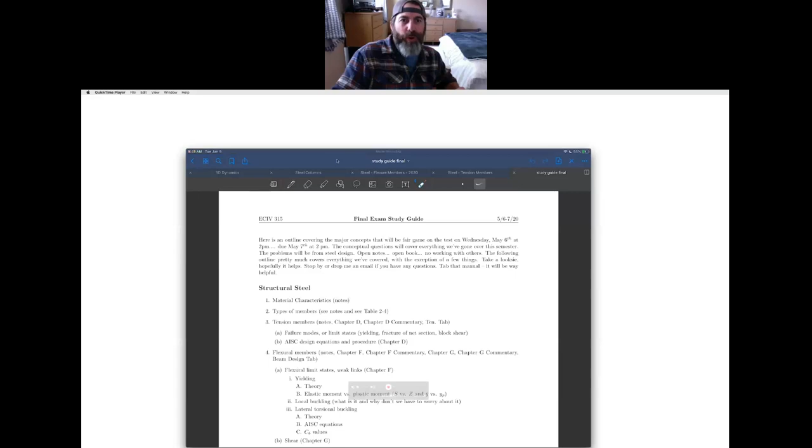So the way it's structured, just so you know, starting tomorrow at 2 p.m. I'm going to post it on D2L, and then it'll be due 24 hours later.

I'm going to break it into three, or it's the same idea. We're going to have conceptual questions for a third, a problem focused on beam design, and then a problem focused on column design.

The short answer stuff, the conceptual questions at the beginning, will be for the whole semester. But it still is going to concentrate on steel mostly. Anything from the beginning part of the semester is going to be fair game, at least conceptually.

The conceptual questions component, I'm going to put on D2L. It's going to be a quiz on D2L, similar to the lab quiz you guys did. I'll set it up so you could start it any time in that 24-hour period, and give you like an hour or so to work it out. But it shouldn't take you that long to do the short answer, true-false questions.

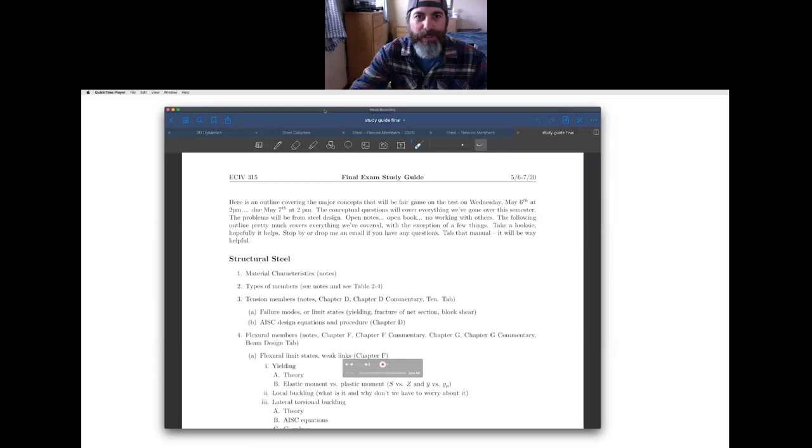Did that work okay for you guys on the lab final? Maybe, maybe not. It worked. He graded all of them already. I don't hear any major complaints. No major complaints.

All right, so I think it's going to be the same idea for the conceptual, and then the other two parts will just be you work out the two problems, and I'll set up a box in Gradescope, and you'll submit it through Gradescope, similar to what we did for the last exam, and then I'll go through and grade it.

What else here? Let's see if I can see chat. Anyways, so Mike, just one thing on the D2L quiz.

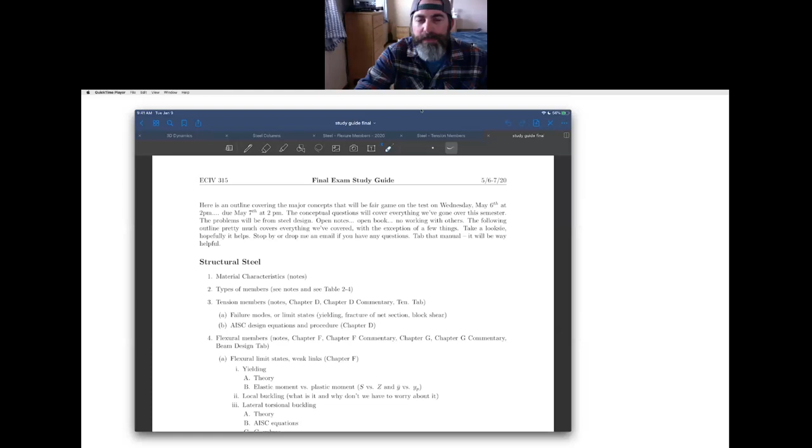I guess the only thing I would suggest is, if it's like a multiple choice thing or whatever, just make sure that it's understood - are you supposed to check more than one, or is it just one - just make sure the question is clear, you know what I mean?

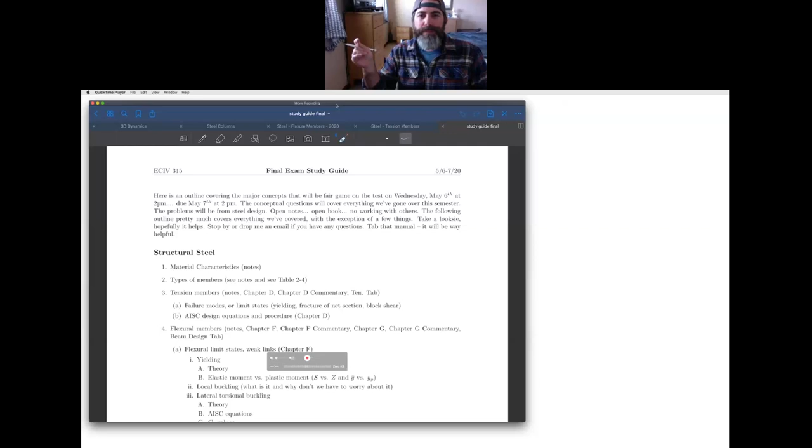Yeah, absolutely. So I'm assuming it wasn't clear last time. There's a couple problems. No, there were a few of them where it was like, okay, I don't know how many to pick, or if I'm supposed to pick one. It seemed to all work out at the end, but it just wasn't totally sure.

Sounds good. Yeah, Jaden did that one, so I'll double check and try to avoid those. I think he's going to put this one together for me, but then I'll make sure that it's all squared away. Thanks for the feedback there.

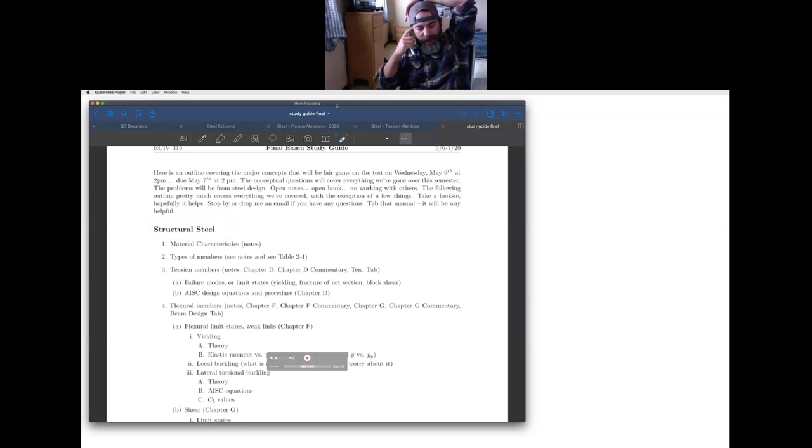Back to school, Paul. Now, so there's the overview of how it's going to be structured and the components of it. I gave you some - there's a study guide for the other two exams if you want to take a look at those. But again, the focus this one's going to be primarily on steel, so I was just going to go through what we covered in steel. We start out with material characteristics.

I might just flip over to what we did. I'm just going to go through the notes here.

So we talked about the design philosophies, LRFD versus ASD. We're going to focus on LRFD. The pros and cons of steel design.

I hate to admit it, but steel is pretty sick. It works pretty well, it's very predictable. It's actually a pretty nice material. So it's got a lot of pros. It's got some cons, right - it melts, it rusts, it's fatigue sensitive.

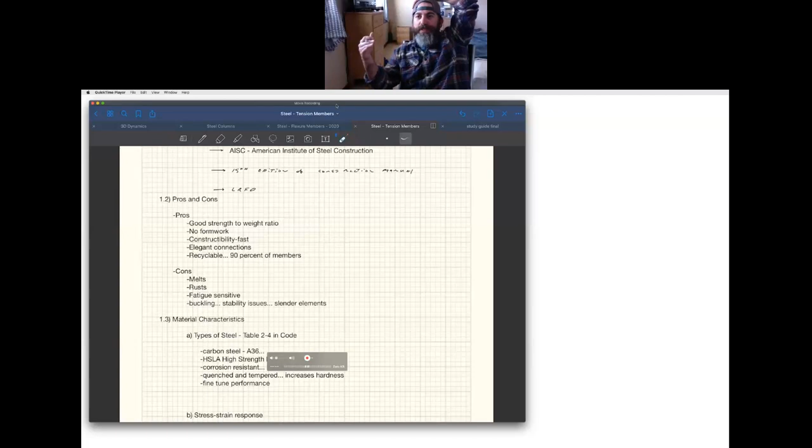Everything buckles, and that's something you should be picking up on throughout all of these, except for tension members. Buckling was an issue - instability kind of controlled the capacity of a lot of things, okay?

And then we talked about material characteristics. We looked at the stress-strain response, what the modulus was, some other key components that were in there. And then we talked about the different types of members, right? Spent a little bit of time on this table right here and went over the types of members there were, and then what they were used for.

What else do we have here?

Then we got into tension members. Tension members typically are going to be part of something. You don't usually just have a tension member carrying tension by itself. It's usually part of a truss or another type of structure.

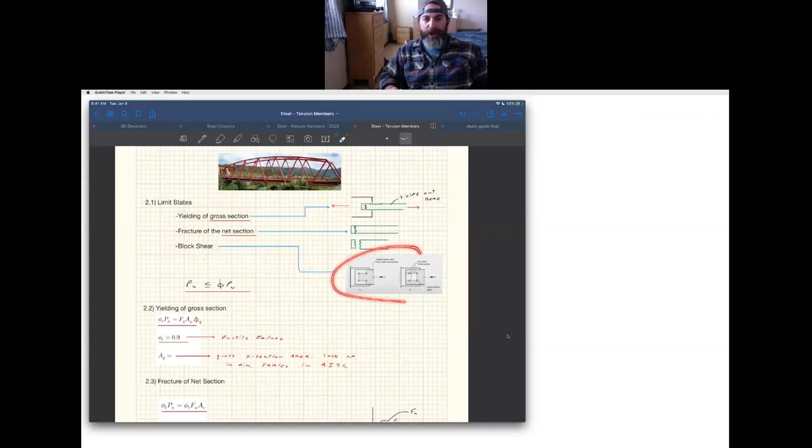We introduced this idea here, the first place we saw limit states. How is the member going to fail? It's either going to have yielding of the gross section, fracture of the net section, or block shear. I think it's worth looking at what block shear looks like. You don't need to study this too much, we didn't talk about how to calculate it, but just knowing what it looks like is important. There's this idea of yielding of the gross section versus fracture of the net section.

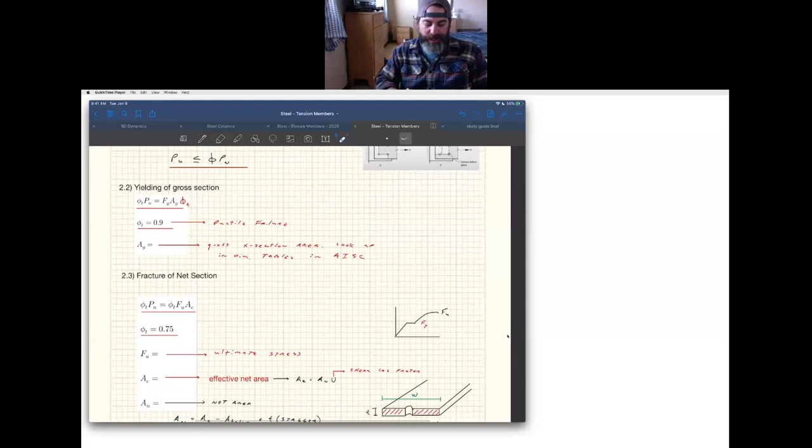The way we did this is we calculated the capacity for each of these, and the lowest one controlled the design. So just look back at the notes on how we go about calculating those capacities. Calculating yielding of the gross section is really easy, but calculating fracture of the net section is a little bit more complicated, because you had to look at how many holes there were, which affected the capacity.

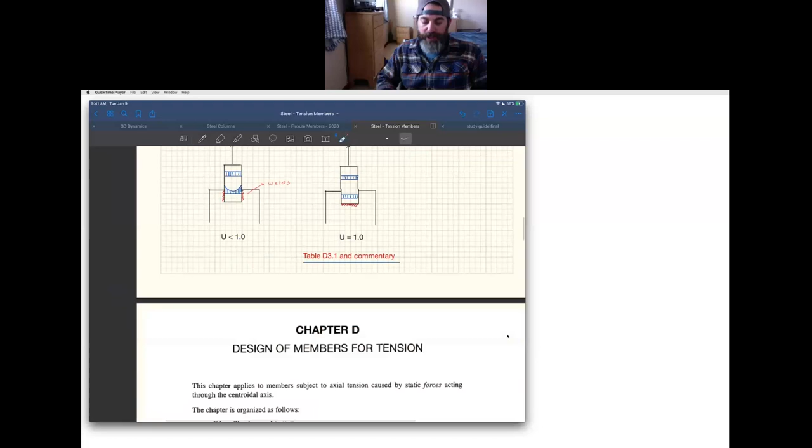If it was staggered or not staggered affected the capacity. If we transferred the load uniformly or non-uniformly, you kind of get penalized if it's non-uniform like we have here. That's where these U factors play in. It was pretty straightforward from there, with lots of little mini limit states within this limit state.

Which hole is it going to rip through? Is it going to be one hole, two holes, three holes, stuff like that? You had an assignment associated with that as well.

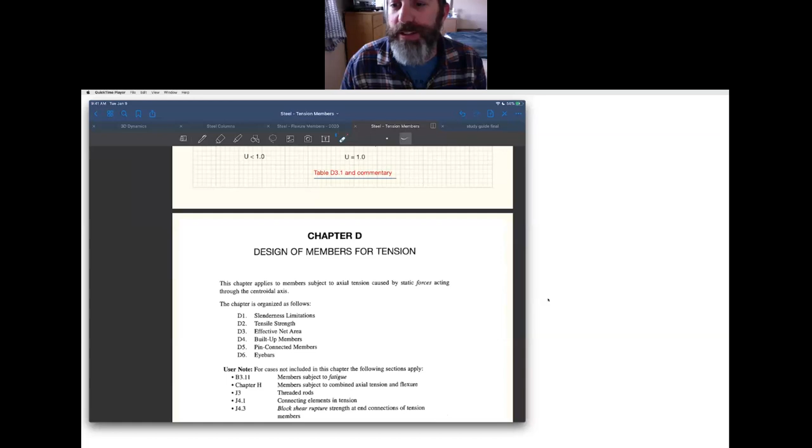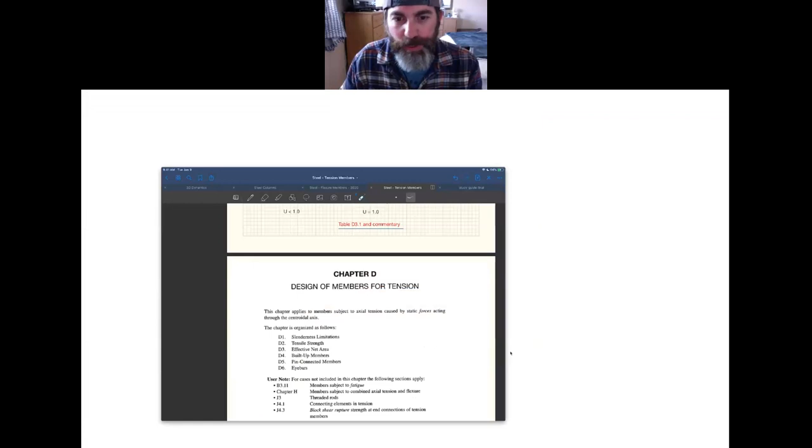When you calculated those capacities, we looked at the limit state of ripping through 2 holes versus ripping through 3 holes, and it showed that it was going to rip through 3 holes. And it actually ripped through 3 holes.

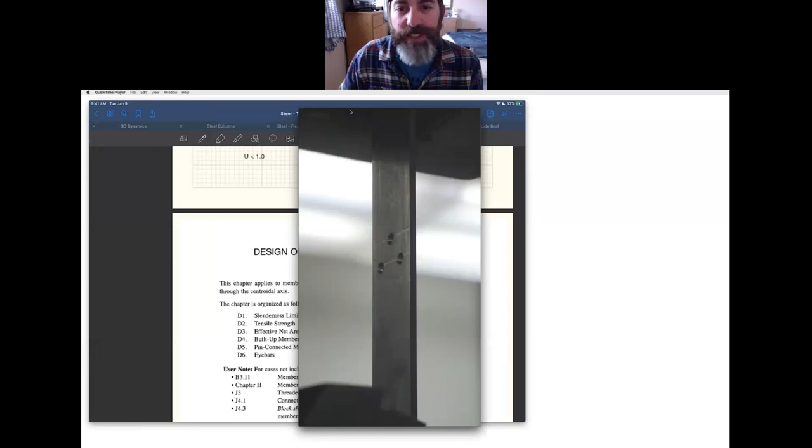And it said it wasn't going to yield around the section either. This guy now, the last one we did, this is plate 3. If you actually look at the calculation, this one says that it's going to yield over the gross section, over the entire height first, and then it's going to fail through 2 holes, is what the prediction was.

Okay, and so here, if you watch it here, so there it goes, it starts yielding right around the holes again. But then once we keep loading it up, the least mechanism in this was yielding over the gross section. So we should see that yielding spread everywhere.

And so if you keep going here, you see that yielding it's just taken off. Right? Now it's coming down from the top. And so look how much the thing is deflecting. You can see it just deflecting over this entire height.

That is considered a failure mechanism right there. Look how much it's deformed. Like you can actually see it deform. That whole thing is yielded. Right? And so that is considered a failure mechanism right there. That would be the controlling mechanism.

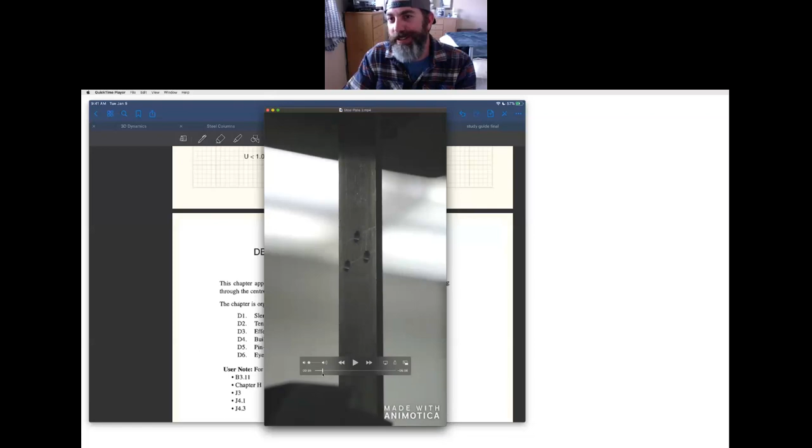Eventually, though, once you keep applying the load, the whole thing goes through strain hardening, and then it rips through 2 of the holes. And what's really cool is that the calculation said it was going to do that, and then it actually did that. Unlike concrete, where we said it was going to do something and it didn't necessarily do what we said it was going to do, steel will do what it says it's going to do.

And I think that one's pretty cool, especially this one, because you can see all that yielding before failure. You guys have any questions about that? I just wanted to highlight it because I think it's worth doing. I think that's some pretty good stuff.

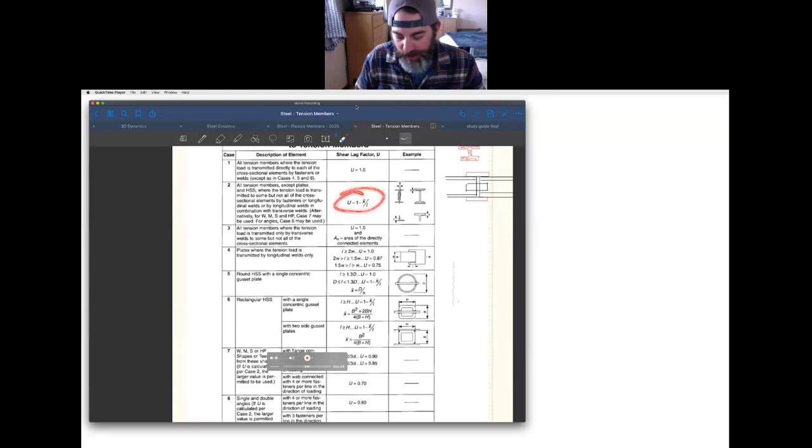So then that's calculating the capacity of tension members, right? We looked at where in the code it talked about that. All this stuff is the code, the specifications. The hardest thing here is determining what this X bar was for calculating this U, but we had a couple of examples, and then you got to do that in your homework.

Right, there's some stuff in the commentary as well, right? How to calculate what the L and the X bar are for the different capacities, and then we did an example, okay? So that's kind of the steel thing.

The one thing I wanted to point out that I did not cover before in class that you might want to look at, is that there are design aids for tension members as well. This is what I skipped over. It was like on a page that I didn't make it to. But this is table 5-1.

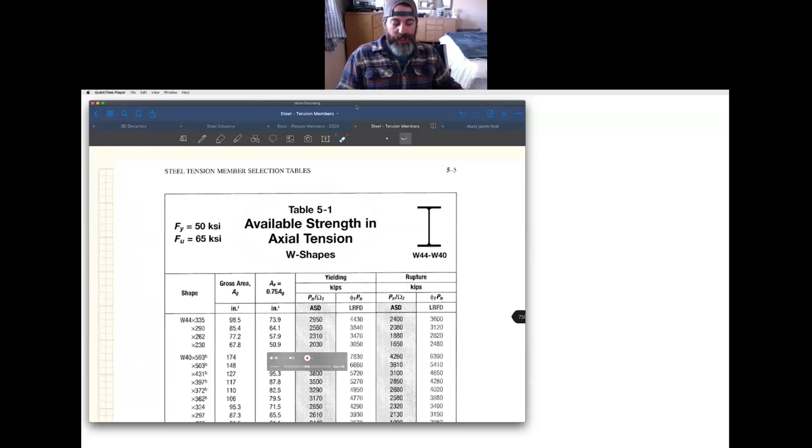This is under the tension tab. If you look at your steel manual, there's a tension tab. If you flip it open, they have this, right? Available strength in axial tension. Okay, and in there they just go through, right? And you look at phi PN, right, for a bunch of different members.

And the way you work this is you look up the capacity, right? And then, so this is what the tensile load is. This is what your PU you would look up in here, and then you could design it according to these members over here. But the one thing is, right, that

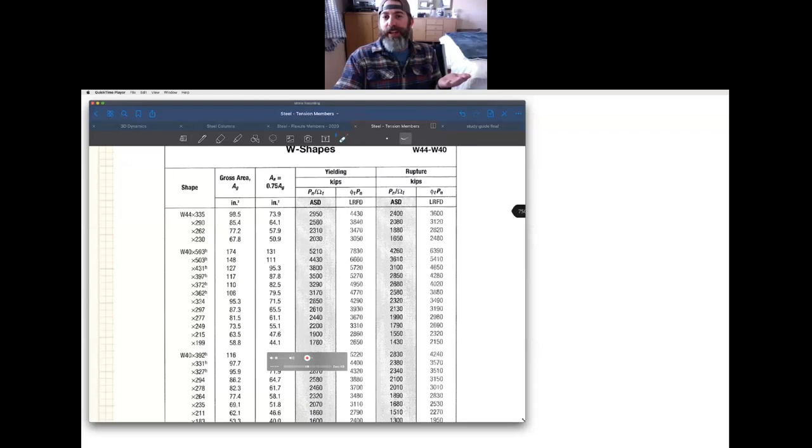you need to know what the hole patterns are and stuff, right? In order to use this table, you need to know what the holes are, right? How many holes do you have in it? What's the U value that you're using? What's the net area that you're using? All sorts of stuff that it's very specific to the member.

So to use this table, it makes an assumption that the effective area is 0.75 times AG, right? You don't know that that's going to happen because you have your own holes drilled in it or punched in it. And you have all the stagger factor that's floating around, and what are you using as a U value? All that's built into calculating this capacity. But to use this table just as a starting point to get going, they assume this AE is 0.75 AG, and then you could use this table.

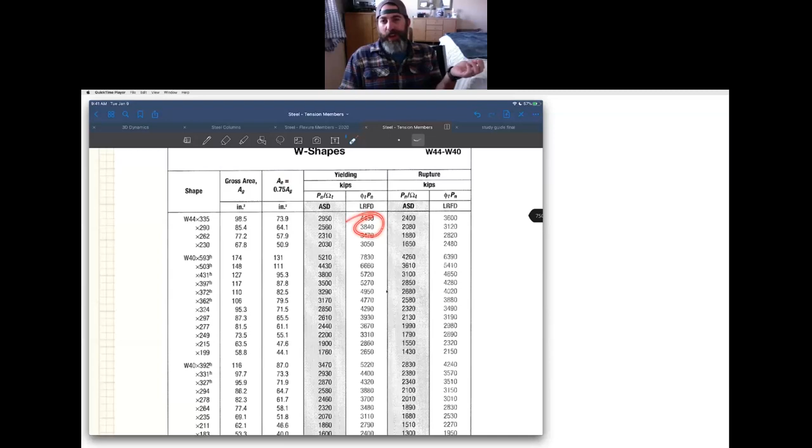So I just wanted to point that out. That exists. And in previous years, I've looked up this homework problem, for instance, or this example problem, and you could use that table. But then you'd have to calculate what that effective net area is and whatnot. But anyways, I just wanted to point that out as we went through.

Okay. Let's go to the study guide.

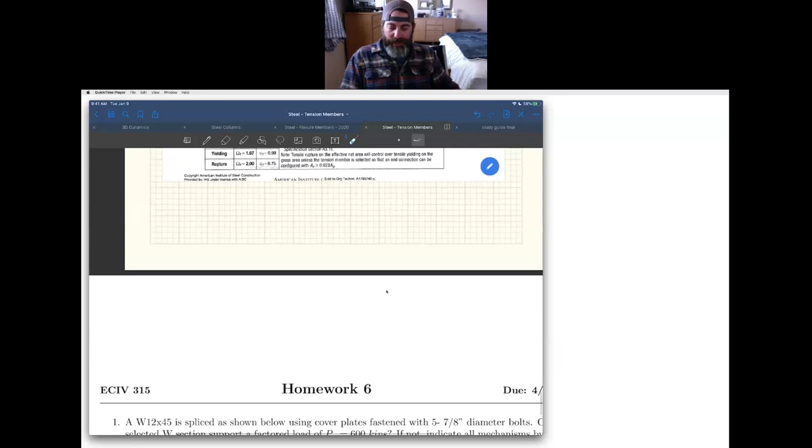The other thing I want to mention about the study guide is I've gone through and called out where you might want to put tabs, like where in the steel manual you find these things. So table 2-4, you'll talk about the types of members and the standard material it's made out of. Tension members, chapter D commentary, the tension tab, that's where you'll want to put your tabs.

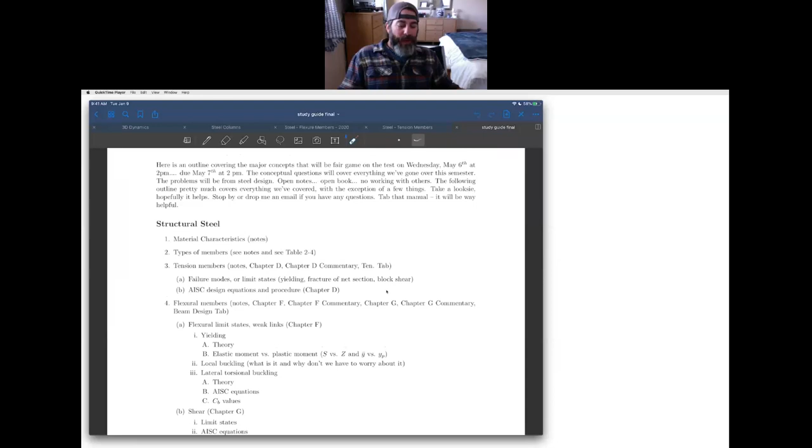And same thing when you go down to flexural members, I've called out the key components and where you calculate that or get the information from. That's something I've done over the years because I was trying to be consistent when doing notes, but I don't know if I was super consistent. I might have missed calling out certain sections of the code.

The next thing we covered was flexural members. I'm just going to do the same thing - go over to flexural members and look at our notes.

Any questions about steel tension members? Anything you didn't quite get that we want to spend a little more time on? Good to go.

So flexural members - this is bending, right? We first talked about what are the limit states. There's flexural limit states: yielding, that's the formation of a plastic hinge. There's local buckling, that's the buckling of a flange. Or lateral torsional buckling, another limit state that can happen, but that's a global buckling procedure - we'll get into those more. Shear has yielding of the web, buckling of the web, and then serviceability, we only looked at deflections.

In terms of flexural limit states, what we looked at that governs our LRFD stuff is this formation of a plastic hinge. That's where the steel yields over the whole height of the member. The way you calculate this capacity is you assume the steel is yielded on the compression side, yielded on the tension side, then look at your C's and T's and sum the moments.

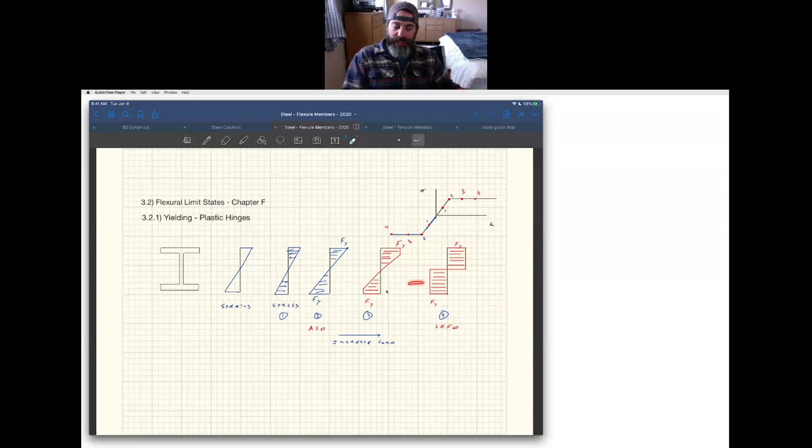The good news is AISC has all these things tabulated. We went through and talked about the difference between the elastic section modulus versus the plastic section modulus, and how to calculate these capacities based off of this. Those Z values, Fy times Z, Z is tabulated in the code. The AISC manual has organized these things based off of Z, because that's a key property we have in design, so they've made a table sorted by Z's.

So the elastic moment is Fy times S, the plastic moment is Fy times Z - the plastic section modulus versus the elastic section modulus. We did a little example with that.

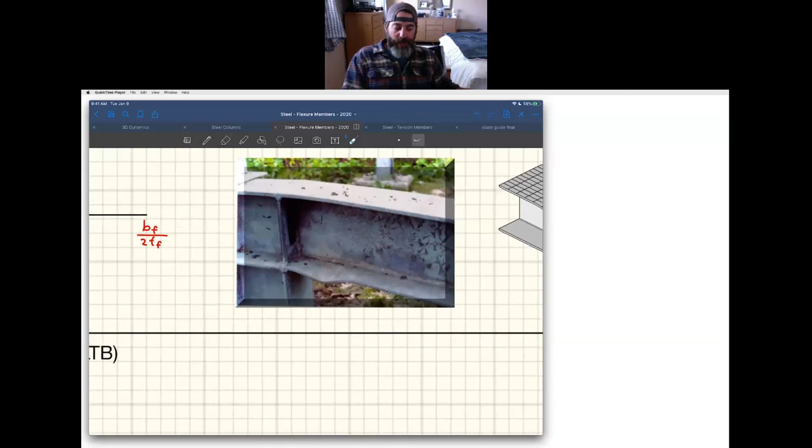Then we talked about local flange buckling. This is what local flange buckling looks like - that flange was in compression and it buckled out. Notice it's not buckling over the entire length of the member, just in one little place. That's why it's called local buckling - it's just buckling in one small spot.

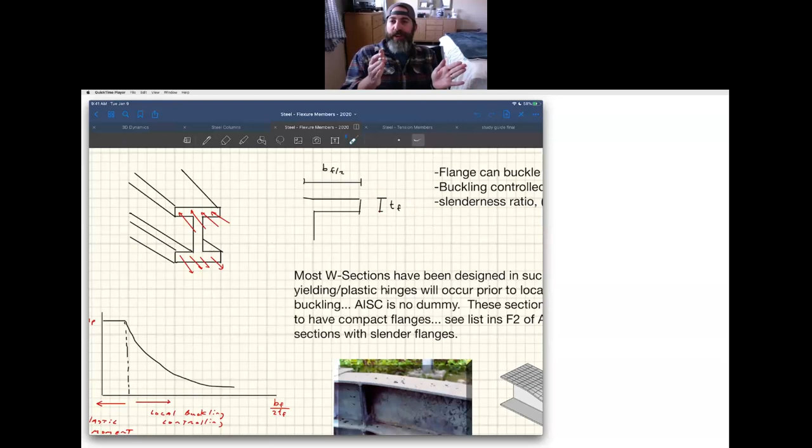This is not going to be an issue for most wide flange sections because AISC is no dummy - they've made this ratio, bf over 2tf, stocky enough so it will hit the plastic moment capacity before you get buckling in one of these flanges. Very clever of them - it wouldn't make sense to make these things slender versus compact. If slender, they're going to buckle and reduce your member capacity. But if stiff enough, stocky enough, you don't run into problems with local buckling. For most sections we didn't worry about that. It's important to know what local flange buckling is, but then just know we don't have to deal with it.

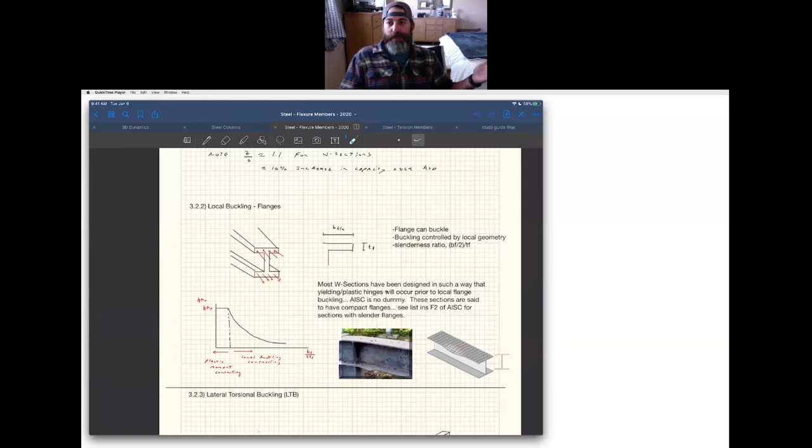If you're dealing with a built-up section where you make one of these yourself, where you take this plate and weld it to this plate and weld it to this plate, then you have to start worrying about this. Or if you have one of the few sections, you have to worry about it. For the most part, though, there isn't an issue.

And then we went on and talked about lateral torsional buckling - we'll come back to that. We introduced what it was: this idea that you get compression up at the top under positive bending, or on the bottom under negative bending. But on whatever the compression flange is, if you don't support it, this thing wants to buckle out to the side, and it wants to flip on its side.

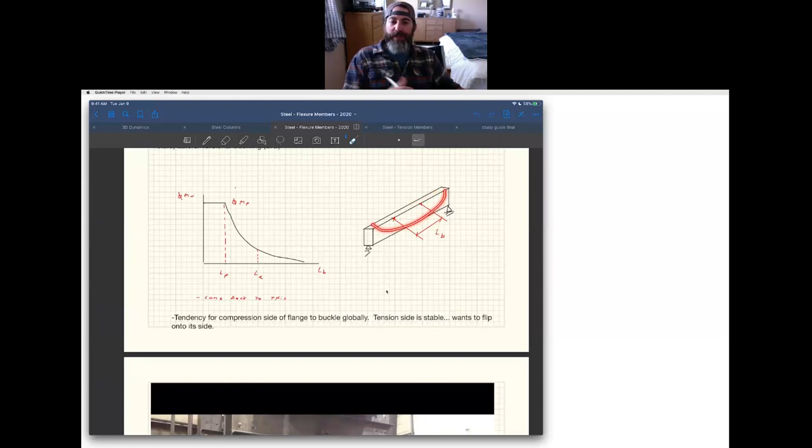If you look back on the YouTube, I've got a little video of Tim White - got me here in the background too, the young guy right there, no beard. We did some testing on this, and if you watch the video, you can see this thing go through some lateral torsional buckling. In this case, the compression flange up top is not supported, and so it buckles out. That complicates the design for sure.

Shear limit states - we'll go back to lateral torsional buckling in a minute - but the shear limit states: either it yields across this web right here, or you get web buckling. It's the same mechanism that caused issues in shear in reinforced concrete.

Shear in reinforced concrete ran into problems with these tension forces, and we get a crack that would go like this. On steel, the web runs into problems with these compression forces because this thing wants to buckle, and it would buckle kind of in this direction here. You can see an example of where they tested a member and got web buckling.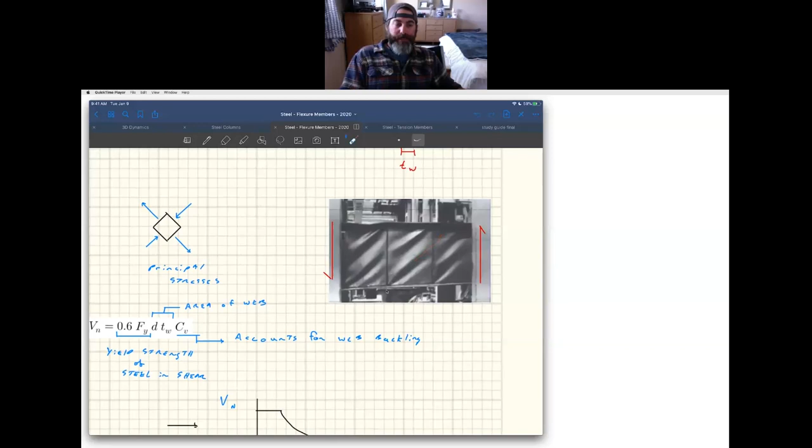But similar to local flange buckling, AISC is no dummy. They made the H over TW stocky enough that it's going to hit the plastic moment capacity before you get reduced capacity due to buckling. They really thought this through.

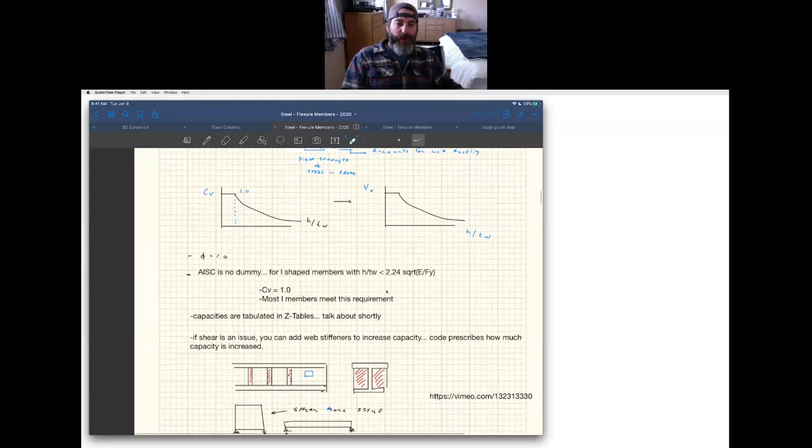We talked about stiffeners, and when shear would control or not control. And then we got into deflections.

How do you calculate deflections? Well, usually there's some sort of limit - it's going to be some fraction of our span length. Live load deflections, like L over this - most standards say your live load deflections have to be less than L over 360, or your total loads have to be less than L over 240.

Where do these delta live loads come from? Well, they could come from solving this 4th order differential equation, or you look it up. These tables, if you go into structural engineering, are super helpful - they have the shear and moment diagrams for all these cases. It's turned shear and moment diagrams and deflections into a matching game.

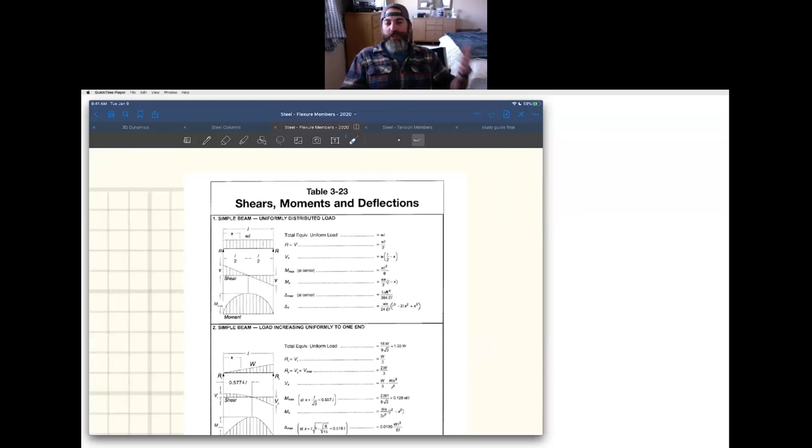You look at your loading conditions, you look at this table, it tells you what your shears and your moments are, and it tells you what your deflections are. When you calculate your deflections, the other thing to be careful of is the units that you're using in these equations.

Also, you use service loads - nobody's going to die if your deflection calculations are not perfectly accurate. Because of that, you don't use the 1.2 and the 1.6 factors; you go straight to your service loads, what you actually think your loads are going to be. That's covered in this little section here.

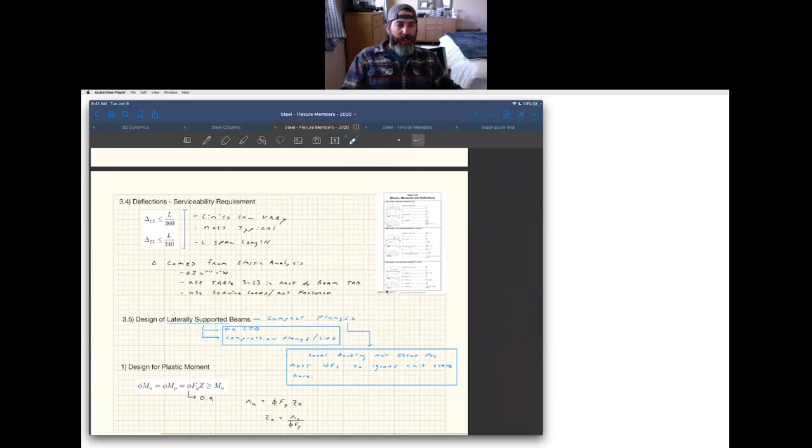But then for no lateral torsional buckling - how do you go about designing these things? Just really quick: use the Z tables. The Z tables have these things organized by Z. You can either calculate this if the yield strength is different - you have to calculate what your required Z is - or you just look up phi Mp in the manual and make sure that your phi Mp is greater than your Mu.

And then to do shear design, super easy - in the Z tables, you look over to the right and it tells you what phi V is, phi Vn, straight up for all the members. So checking that capacity is pretty easy, and then you check your deflections. That's a standard design - we did an example of a standard design.

You had homework with that. You guys should have that one down pretty good.

The thing that gets a little complicated is if you have lateral torsional buckling, if you don't have supports along the length, then things get a little bit more complicated, but also not too unruly, okay?

So lateral torsional buckling, again, is this top flange wants to buckle out, or if it's a negative bending, it's the bottom flange that wants to buckle out.

And depending on what governs that is what this unsupported length is. If this unsupported length is less than LP, which is tabulated, then it's the plastic moment that controls. If that unsupported length is greater than LP and less than LR, inelastic lateral torsional buckling controls - you're kind of in this region. If your LB is greater than LR, then you're in this region, and it's elastic lateral torsional buckling.

And the code has equations for each one of these things. This one we already know. These ones are getting pretty complicated. But to do a design for this...

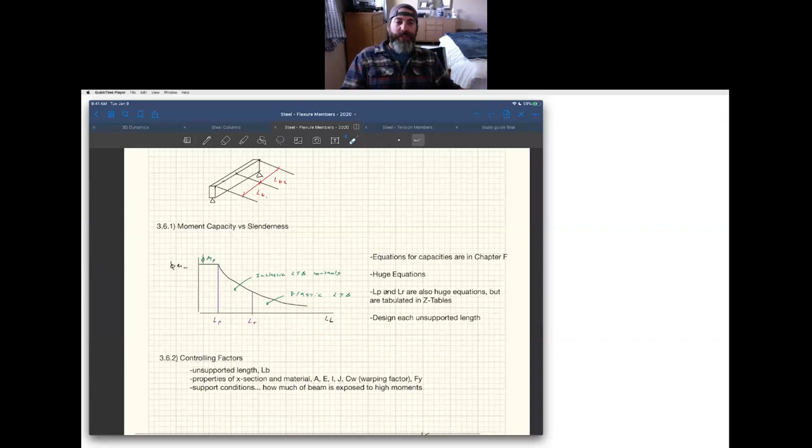gets super complicated, because if you look at the equations for this and this, there's no simple variable to solve for to do design. So they have a method for doing that, which we're going to get to.

I mean, they basically have just plotted this curve for all the different members in one giant table. One giant table that spans 50 pages or something like that, okay?

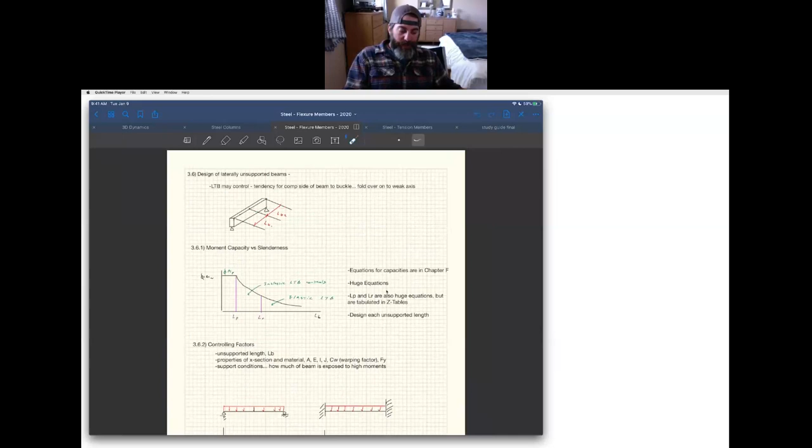The other thing though to be careful of, the other thing that governs how susceptible something is going to be to lateral torsional buckling is all these properties, right? Material properties and geometric properties of the section. These would go into what LP and LR are, okay?

So this one will have you get rewarded with a CB value. This is going to have a CB value that's going to be bigger than this CB value, okay? And so we have to account for this effect as well.

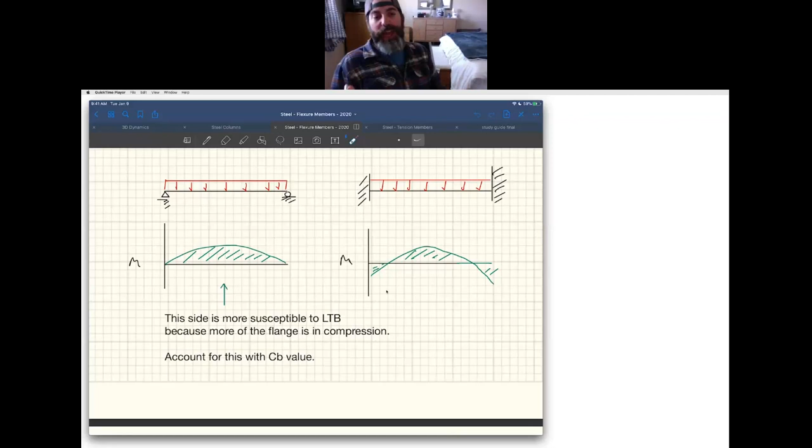How much is the compression flange in compression? What percentage of the length is in compression, as well as how extreme is that compression? In this case, it's not that extreme because you have zeros at the ends and zeros at the ends. This case right here, really extreme, right? Because you have the worst case compression stress along the entire length of the member, right?

And so this is the worst case scenario you can have is 2 moments on either end, okay? And then you'll get a worst case uniform moment across the whole thing. In that case, CB is equal to 1.0, okay? That is the worst case scenario, is make it CB equal to 1.0.

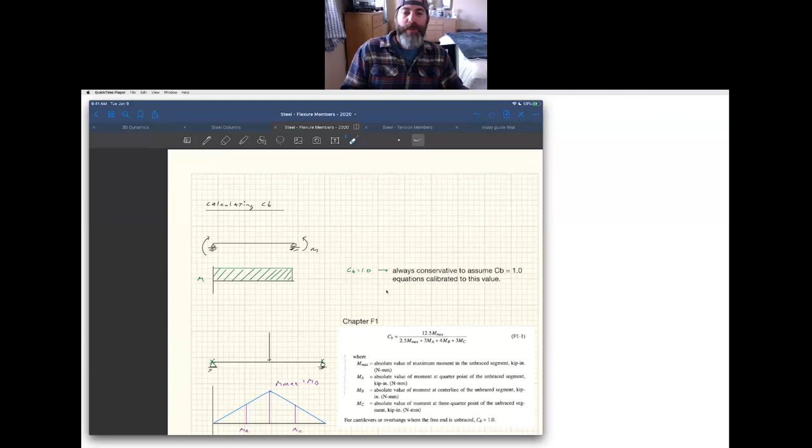How do you calculate what CB is? Well, there's this whole equation right here, and you did this in an example. We did it here. You did it in your homework, so you should know how to calculate what that CB value is, okay.

So CB's got to be in there someplace, right? It's in those capacity equations.

If you look in the code, the design aids, we got Z tables, we got I tables. So if for some reason your deflections control, you can use I tables. Those things are just organized by members in order of their I's. And they've done that because just in case deflections control, they've got them ordered by their Z's as well.

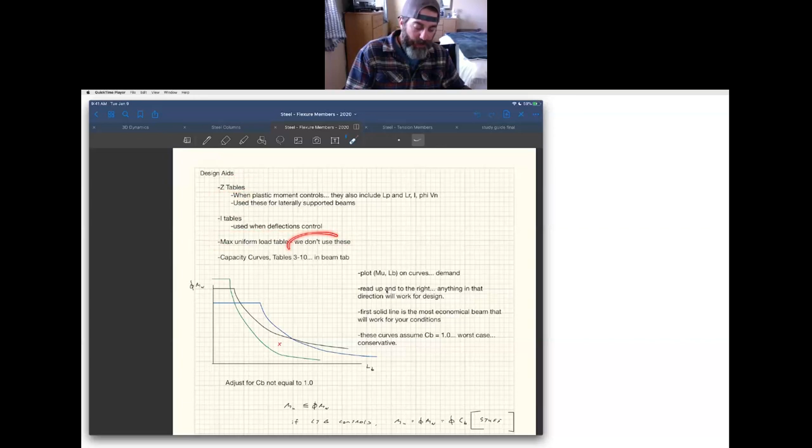There's these max uniform load tables. I don't use those, those are kind of weird, okay. And then capacity curves are the other thing. That's what we did use.

So again, what they've done is for every single member, every wide flange in their arsenal, AISC's arsenal, they've gone through and put all of them in one big giant table. And that's what that table 3-10 is.

But what you're looking at, each one of those pages are little subsets of this, right? Each page is like some component of this, okay? And then you just look at each page, and really, if you pieced them all together, you get the big picture, was just looking at this.

The way you use this is you plot your demand, MU and your LB, you read up and to the right until you hit the first solid line. That gives you the most economical member, okay?

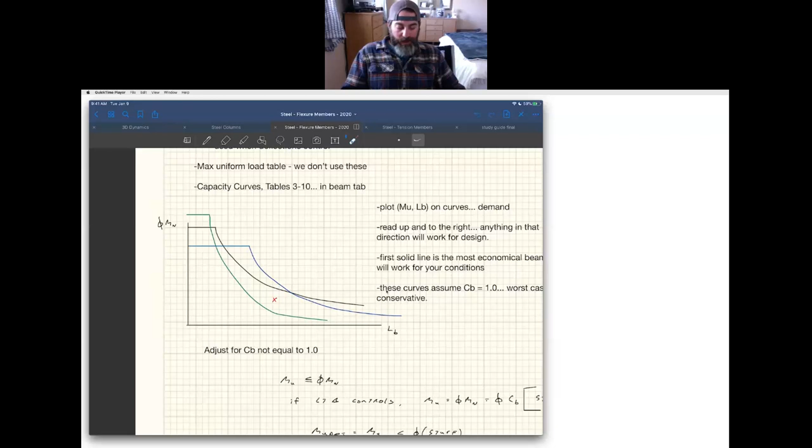Yeah, and so we got to use those tables. Those tables are specifically for when CB is equal to 1, worst case scenarios. It will always be conservative to assume CB is equal to 1, okay?

But if you're not always trying to be conservative as a structural engineer, you want to be the most efficient, right? You want the most efficient section. Your clients won't be too happy if all of their members end up costing twice as much because you were just being overly conservative. They don't want to overspend on their building.

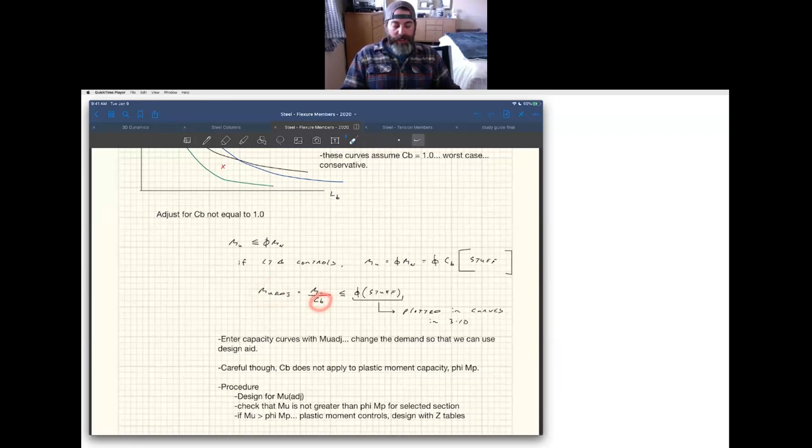And so if you have to sharpen your pencil and calculate CB, you can use these tables, but it involves adjusting your moment demand. You take your moment demand, divide by CB, and then use that new moment demand in your table, and you read up and to the right. But in order to do that, you got to be a little careful about what's happening with the plastic moment. I laid out a process for how to handle that and make sure that it's okay.

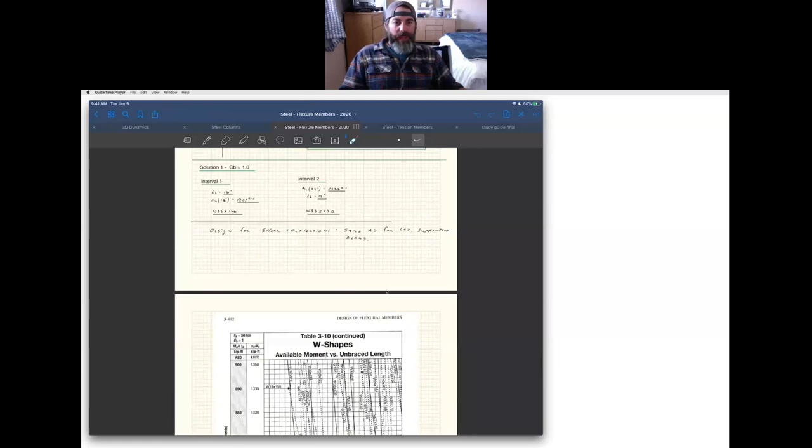And so that's lateral torsional buckling. We went through and did an example associated with that as well. We did it once calculating CB and once not calculating CB, but you get the same result. You don't have to do it both ways—I just did it in this particular example to demonstrate.

Okay, you guys have any questions about flexural stuff? We haven't covered a lot in the last few weeks. I think maybe we have, but I think it's pretty straightforward. Hopefully you like steel design a little bit better—I think it's a little easier to grasp, to be honest.

It pains me to say that. It pains me to say that. Concrete is where I make my living, so I feel like I do a pretty good job of selling it. And then columns—the last thing is the steel columns.

The last thing is the steel columns. Oh, hello? Yeah, what do you got? Sorry, didn't know if my mic was working. I had a question from that homework.

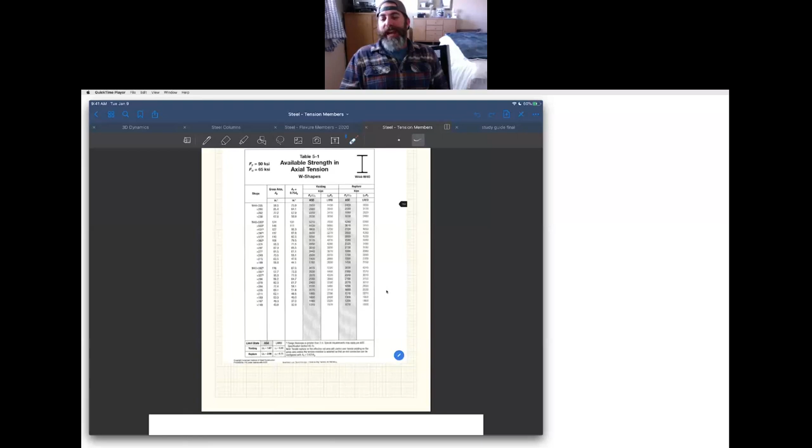I'm trying to see how to word it, going back into that material—something about it says the required I for the deflection limits always leads to the same beam you got from the other limits. It shouldn't. I think it might have in that example, but it doesn't have to, Amanda. I think when we did an example, usually it required I—is that what you said? Yeah, when we did our example for that one, I don't think it did, right?

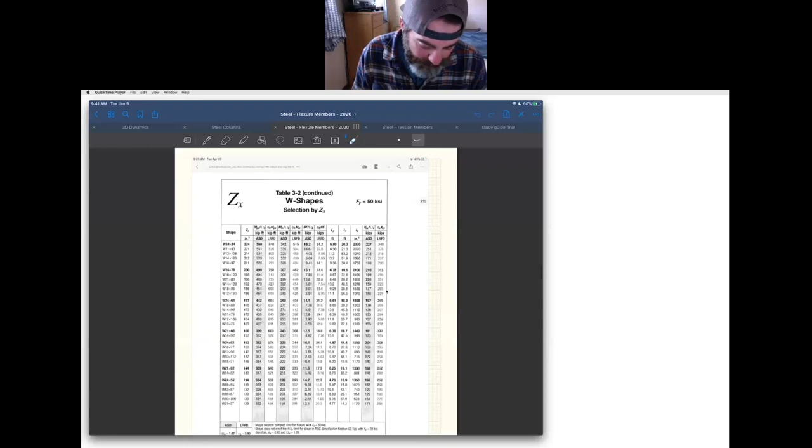I did one where I gave more stringent deflection calculations or deflection limits. Let's see here. This is without the lateral torsional buckling stuff. We did one without lateral torsional buckling where I demonstrated the use of the I tables. Mm-hmm. Yeah, this guy.

Right, so we designed this one to begin with, just based off of the moment demand, and we came up with a W21 by 44. And then we checked the shear and we checked the deflections, and they were okay.

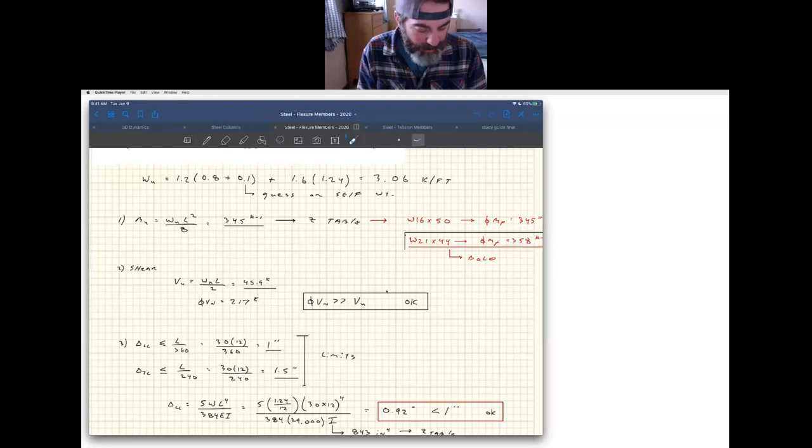But then I said, what if this happens? What if we have a more stringent deflection limit, like L over 720? This happens sometimes—if the contractor has a certain floor that they don't want to feel like any movement whatsoever, if they've got equipment in there that's fatigue sensitive or vibration sensitive, they might come out and say let's make these deflection limits super tight.

And in that case, we went back and solved for the required I, and we ended up with 1560 for that required I. We used the I tables, and it came out with a W24 by 68. So when deflections didn't limit, a 21 by 44 was fine, but when deflections did limit, we needed to make it deeper, down to 24 by 68. So it doesn't always have to be that you get the same section based off of that I.

Did that answer your question, or? Yeah, I think it had to do with there being two different kinds of deflection limits.

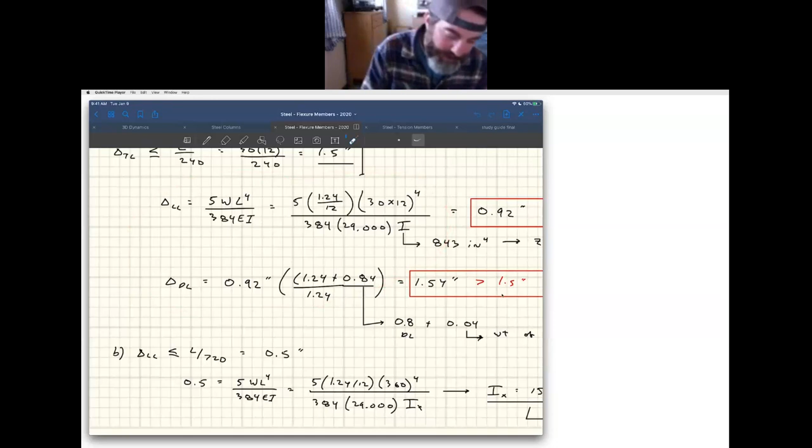If you know—yeah, there's the live load and the dead load deflections. Is that maybe what it was? Oh, the live load deflection and the total load deflection. Yep. Oh, I made a mistake—was it live and total, right? Yeah, it's total. Yeah, my notes have a mistake.

I wasn't done with it yet. Oh, let me finish. There we go.

On the homework, the live load deflection came out to the same beam as the total load deflection. So I wondered if you had to do both of them.

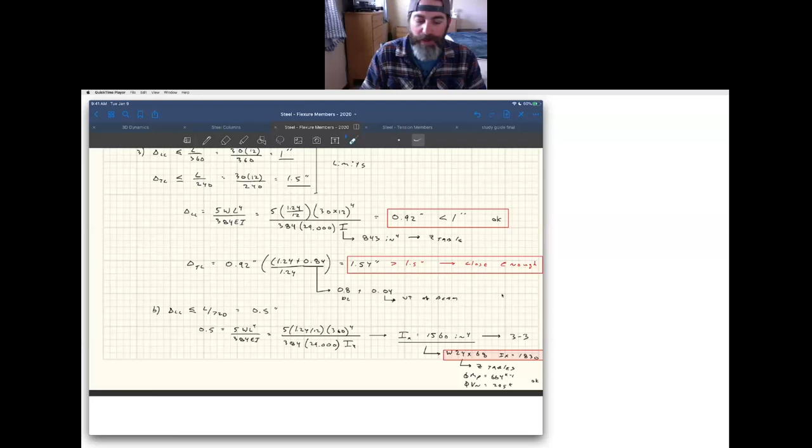Yep, I think that just happened to be that way. I think it would depend on the ratio between your total load and your live load. If your live load was 90% of your total load, you'd get a different thing than if your live load was 10% of your total load. So it depends on that ratio. I think maybe it just ended up being the same beam on that example.

Yeah, and that was my first time calculating those because we didn't do deflections in the example in class, so I just wondered.

Yep. And it's also worth pointing out that these deflection calculations are kind of independent of the lateral support calculations. When you have those lateral supports spaced at, say, the third points like your homework had them, those lateral supports will not affect your deflections at all. They don't affect your moment, they don't affect your supports.

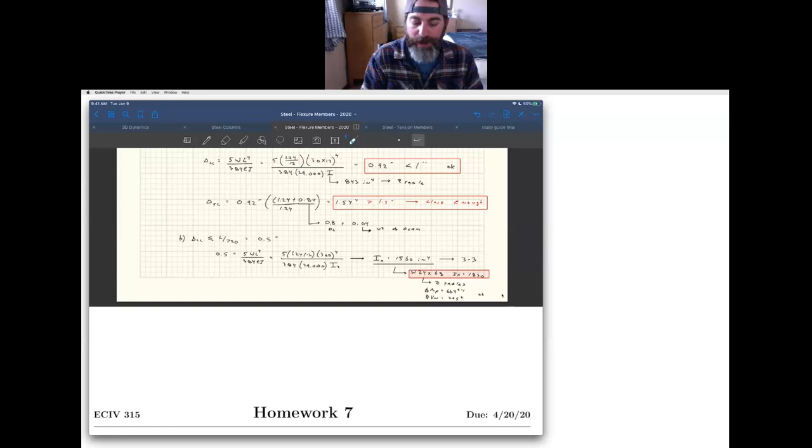They're just there to prevent that top flange from buckling out. They don't resist any vertical loads, just the horizontal load from it wanting to buckle out. So you'd use the same appropriate equations as if those lateral supports weren't there.

I know students in the past have messed that up a little bit, so it's worth noting. Any other questions on that?

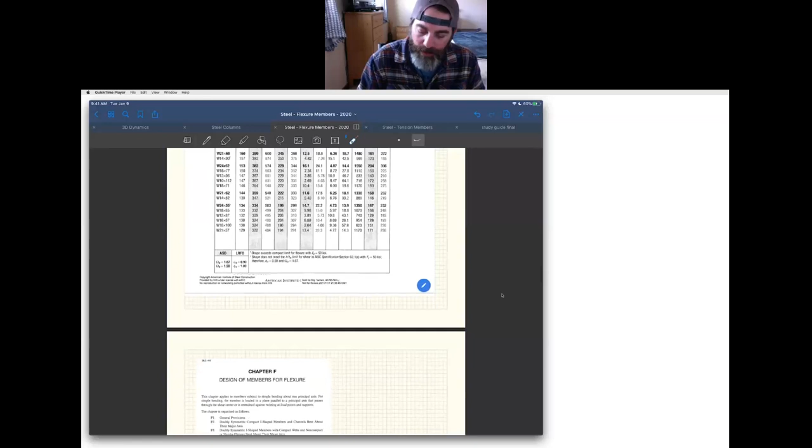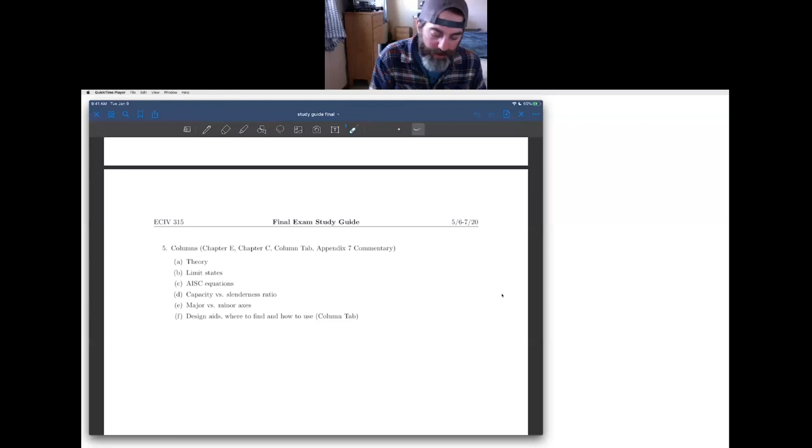Okay, good. So columns, that's the last thing we covered in the last couple lectures or so. You're going to find all those components here: Chapter E, Chapter C, the column tab, Appendix 7, and the commentary. Let me just open up those notes.

So this whole idea, what we did is start out with the limit states again. You're going to have yielding and global buckling. Those are the two we're going to worry about in this class, because local buckling probably won't be an issue since we have compact sections — the flanges and webs are thick enough that you don't get local buckling. So we're only dealing with these two limit states.

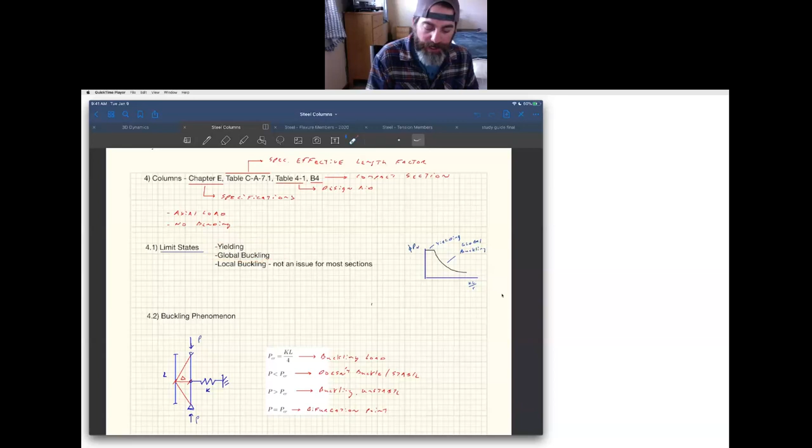Then we talked about where you find all this stuff. You're going to have a capacity curve — the capacity is yielding up here, and after a certain point buckling takes control, and the factor controlling that is KL over R, our slenderness ratio for columns. So again, this is another example where you see this capacity curve throughout.

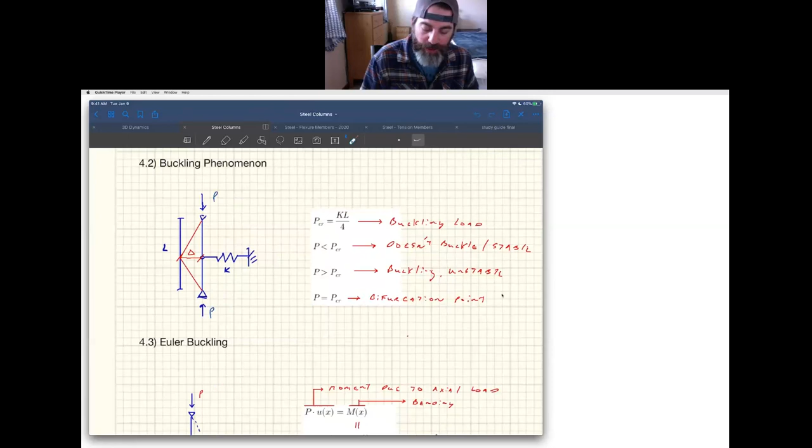The buckling phenomenon in general, I wouldn't worry about too much. Did you guys cover this in mechanics of materials? Did you talk about buckling there? No? That was two semesters ago, who knows what you covered. You don't remember it, but it's a cool topic.

If you ever get a chance, in grad school we talk about this a bit more, but buckling's kind of neat — this idea of applying a load, having a restoring force from stiffness that pulls it back into place. At some point the moment from the load will overpower the restoring force and the thing will buckle. You can mathematically show it doesn't matter if you tap it from the side or not, it will still collapse. That's the same idea Euler had back in the day.

He looked at beam bending — it doesn't have one of these springs, but the beam doesn't want to bend sideways, so it has resistance to that; bending of the beam wants it to pop back into place. He went through and looked at what moment was coming from the axial load versus what moment was coming from the bending, set them equal to each other, and that's where you determine the buckling.

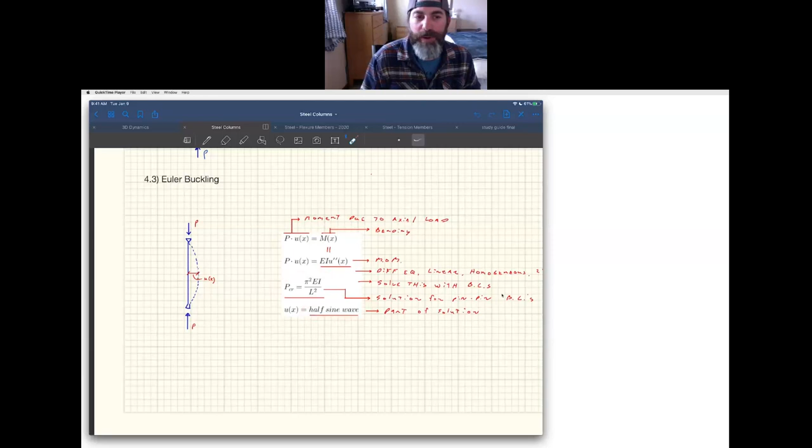You solve it and get this load, and the solution is a half sine wave. Instead of solving this for every case, this is specifically for a certain load condition or end condition, which is a pin and a pin.

If you had a fixed at the top, you would get a different answer. If you had a fixed and a fixed, you would have a different answer. If you had a side sway, you would have a different answer. So instead of having a bunch of different answers, they just modify this value with this K value out front.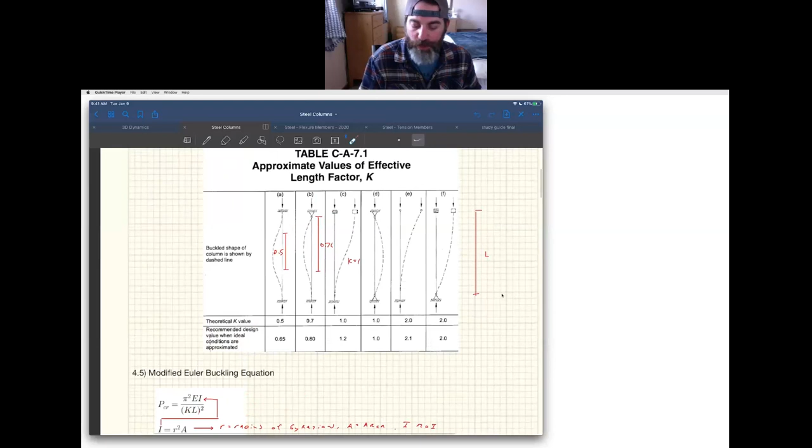And that's equivalent to the solution of solving this thing with different boundary conditions. So they've done this for us, they said, here are all the different boundary conditions that you can have. And what you're looking for is where the half sine wave is. You don't really need to do that.

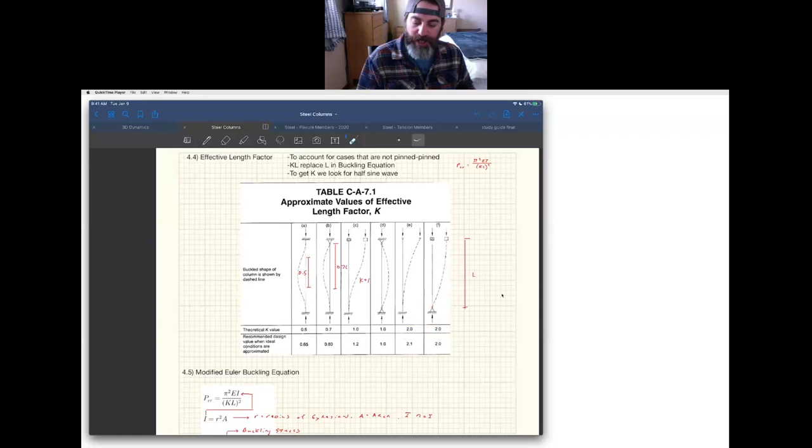That's just to explain where it's coming from, it all comes from this. The half sine wave in this case goes all the way down there, so that's twice the length. Half sine wave here is over there, and so that's why these guys get K's of 2. But it's to account for these different load conditions and the effect they're going to have on stability, using those K values.

We went through and calculated this equation that AISC used. For some reason they talk about buckling stress as opposed to buckling load, so we turned it in terms of that. This equation shows up directly in the code, and here's what the code looks like. We spent a little bit of time talking about that.

And they kind of lump two failure mechanisms into one. They have yielding and inelastic buckling, kind of this region right here. And then from this region on, it's going to be elastic buckling that controls, and there's the equations for that. This is almost the same as the equation you see over here.

The only difference is this 0.877 out front. I like to see that as a concrete person - I like to see that they're using empiricism as well. It's not just the concrete people doing it, they do it too. And that's to account for initial crookedness.

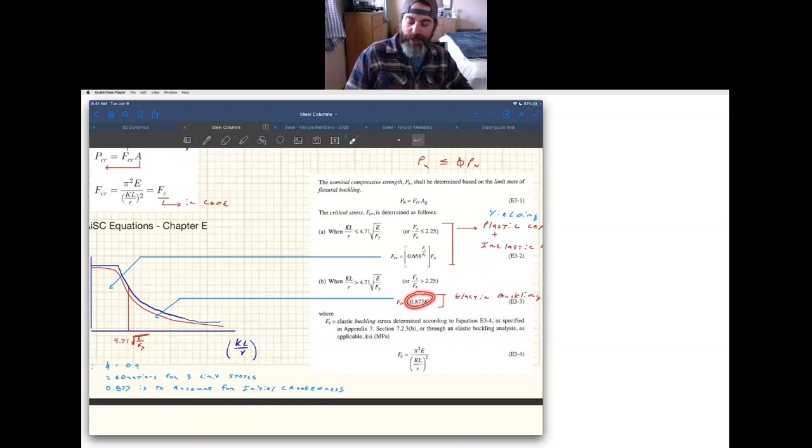But for the most part, we don't have to use these equations, because AISC is no dummy, and they've provided us with some load tables. Things get a little bit complicated because of this whole weak axis versus strong axis buckling thing in the code. A lot of times you'll support a weak axis.

This is an example of them supporting a weak axis but not supporting the strong axis. So in the strong axis it would buckle over this whole height, over the weak axis it could buckle over these shorter heights right here. Which one is more likely - the weak axis buckling over a shorter distance, or strong axis buckling over a larger distance? You don't really know, you can't really tell.

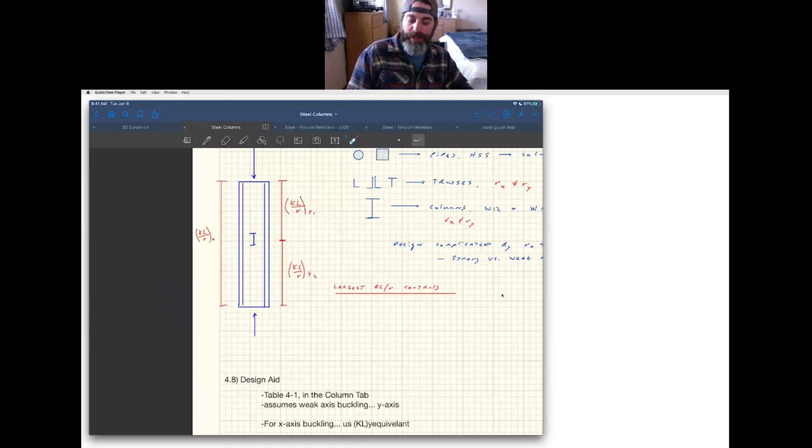And so that's kind of what this whole other stuff was about - how do you use these design aids? Because they're based off of buckling about the weak axis, what you do is you come up with this KL equivalent by dividing by Rx over Ry, and then you can use those tables.

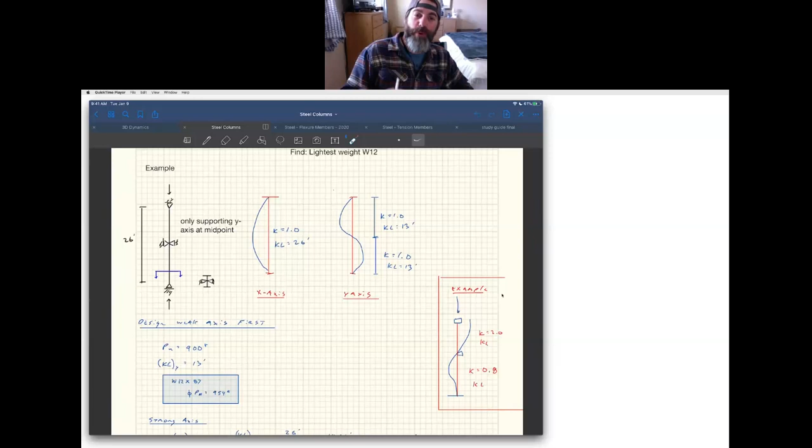And if you remember the video, if you watch the whole video, I struggled with explaining that a little bit, but I got it down - I think I nailed the reason why you do that. The beginning of the code also tells you that. If you look right before those design tables, it says specifically to do this, to divide by Rx over Ry, to use it for strong axis buckling.

The other thing I should note is that I have a PDF of the old code, and the old code calls it KL. Your code, the teal steel code, uses LC, I think is the variable they use. It's the same thing - if you look at the beginning of the table it says, by the way, LC is KL. But for whatever reason they've moved to using LC instead of KL.

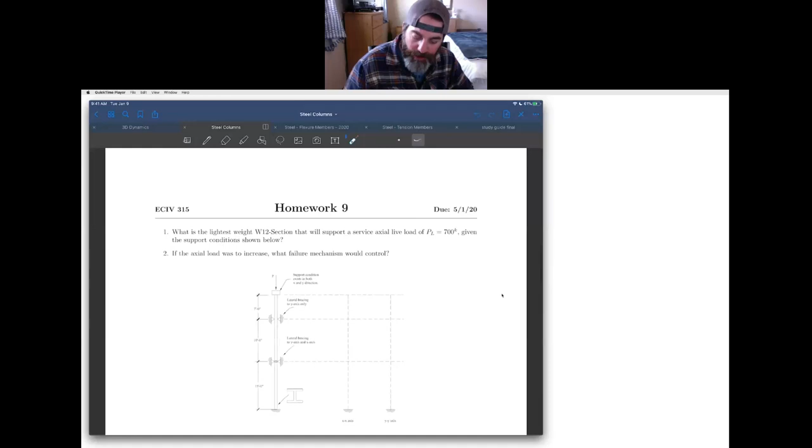And then we did an example, and you did a homework problem similar to this as well. I should also point out - oh, I got it down here - you did this homework problem. This is where I messed up in my solution.

For some reason, I ignored the fact that this is 17 feet here, and I just used 10 feet. So if you didn't look at the solution, it should be 17 feet. I've updated the solution with the 17 feet in there, so it should be better.

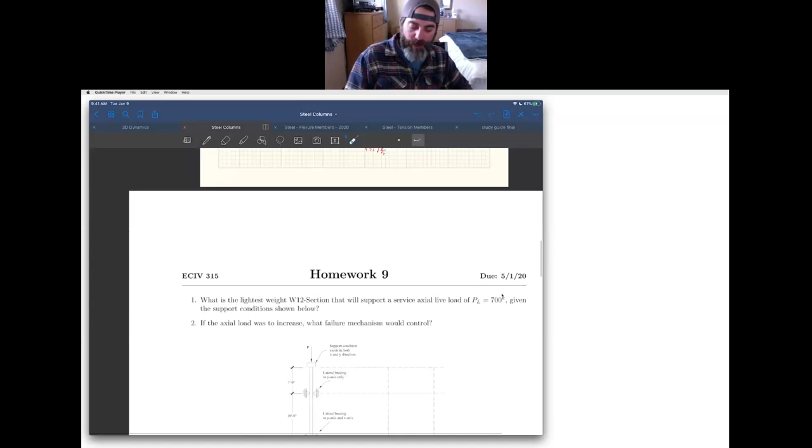The other thing is when you calculate that KL over R, I saw this in quite a few places. If you're trying to see where you are on this curve, you've got to be careful of units. Your KL is probably going to be in feet, but this stuff is going to be in inches. So your KL over R needs to be in inches.

You have to take your KL and multiply it by 12. Your Rx or Ry, depending on which axis is controlling, is going to be in inches. This thing goes in KSI, this guy can go in KSI, and then everything's fine.

So those limits should be close to each other. I think some people got like 6 or something - that's because you left it in feet. It should be around 100 for those limits. Just be careful of your units when using that.

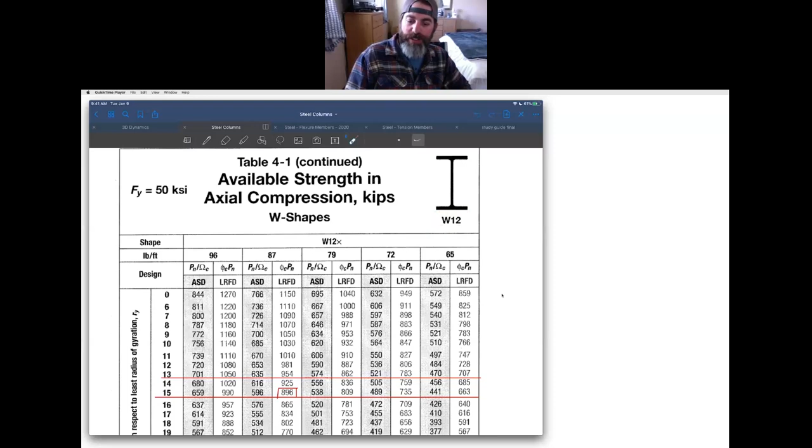The other thing I wanted to note is this is the table that you use for design. We only used the ones for wide flanges, like W12s. They also have W14s, and they also have it for a bunch of different members as well. Let me see here.

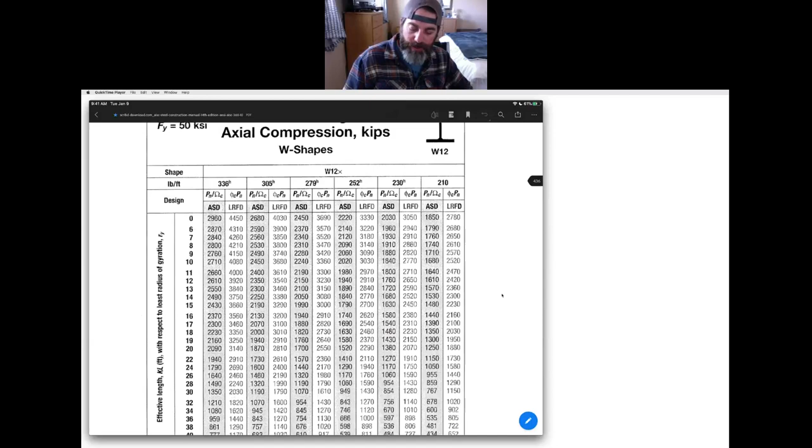Table 4.1 gives us W14s, and then W12s. I think in my notes I just said they had W12s and W14s, but they also have, if we keep going, W8s I think - let's see if I can get to it. Oh yeah, W10s, they do W8s as well.

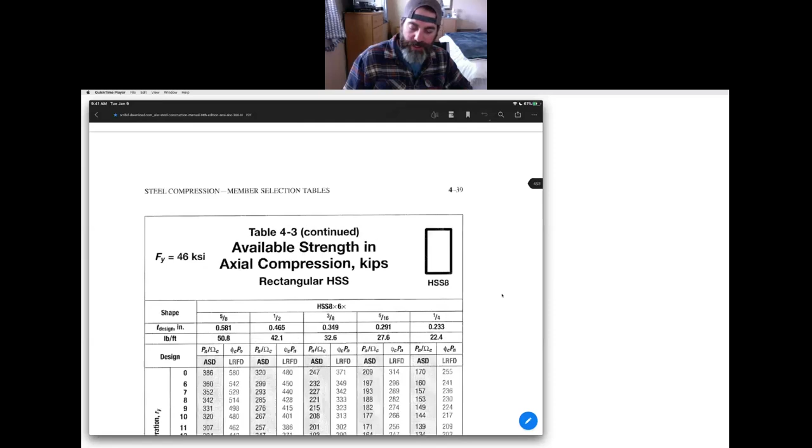They also do HSS sections - they have HSS sections in here, square HSS sections, right? So I just wanted to point that out. I think in my notes or when I was lecturing, I said they got these things for W14s and W12s, but they have them for W14s, W12s, W10s, W8s, HSS sections, square HSS sections as well. So they do have it for a variety of sections.

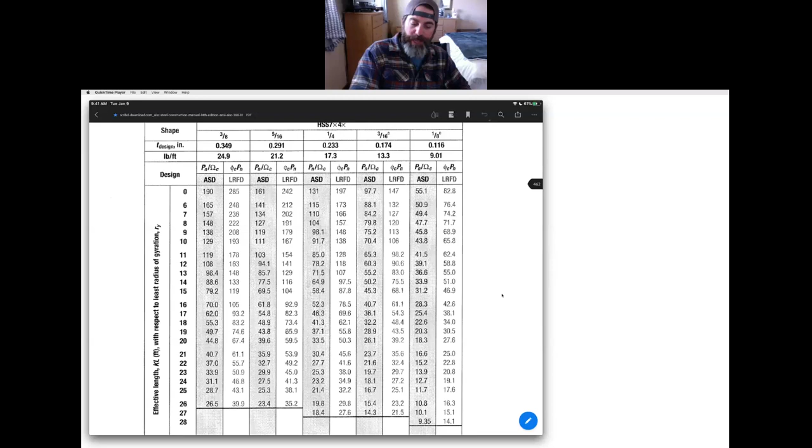But you read them and use them all the same way. You look up what your KL is or your LC is - this is your weak axis buckling on the left over here. You're just looking up what your PN is for each of these different members as you go across. I just wanted to point that out too. It's something I missed before, pointing out that those existed.

Major versus minor axis - you've got to be careful of that. Design aids, where to find them, how to use the column tables. Yep, cool beans.